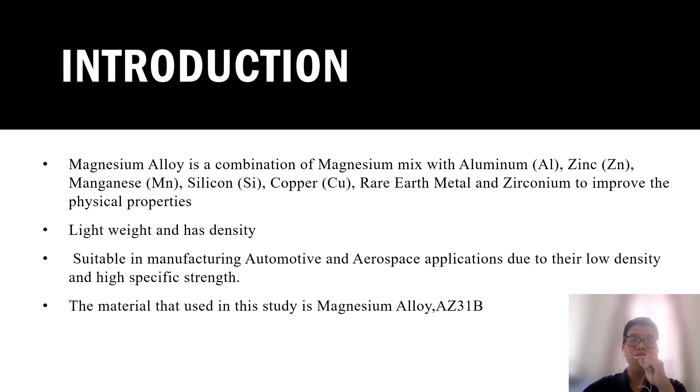The material used in this study is magnesium alloy AZ31B. Problem statement: Magnesium alloy AZ31B could replace rolled homogeneous armor RHA due to its impact behavior. However, the composition of AZ31B is insufficient to support energy absorption, which will cause this material to fracture. It also has low mechanical strength and poor ductility. Therefore, heat treatment and quenching process is needed.

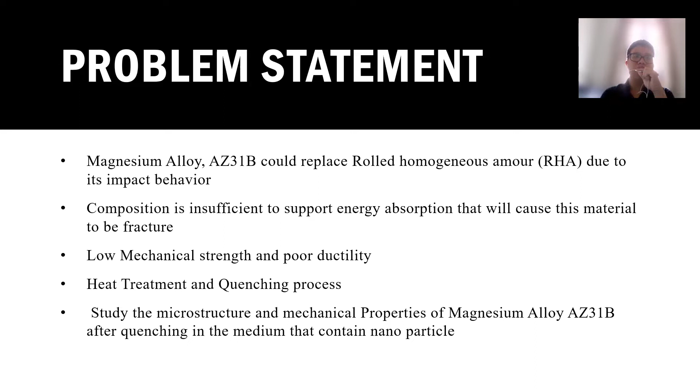The purpose of this project is to study the microstructure and mechanical properties of magnesium alloy AZ31B after quenching in a medium that contains nanoparticles, which is graphene oxide.

Objective: to evaluate the effect of various temperatures of heat treatment towards the microstructure and tensile properties of magnesium alloy AZ31B. Next is to evaluate the effect of various weight percentages of graphene oxide medium towards the microstructure and mechanical properties of magnesium alloy AZ31B.

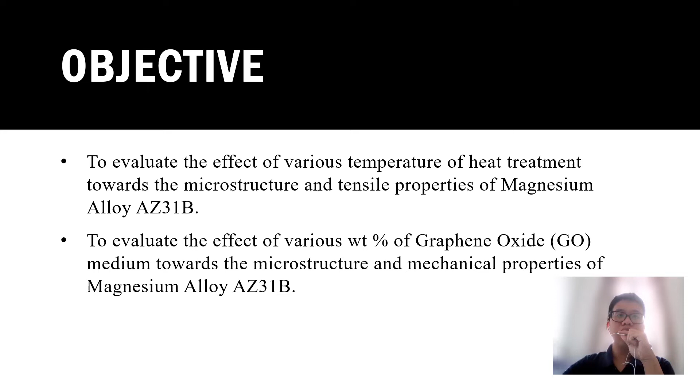Scope: the material used in this project is magnesium alloy AZ31B with heating temperatures of 250 degrees Celsius and 350 degrees Celsius. The quenching medium used is a combination of distilled water with graphene oxide at various weight percentages, and medium like air and distilled water as the control parameter.

Energy dispersive X-ray spectroscopy, or EDX analysis, will be conducted to see the microstructure of magnesium alloy AZ31B, to identify the presence of graphene oxide at the surface of the material and determine whether each specimen consists of graphene oxide or not. Tensile tests will be conducted to test the energy absorption of magnesium alloy AZ31B, to determine how much it can be deformed before it fractures.

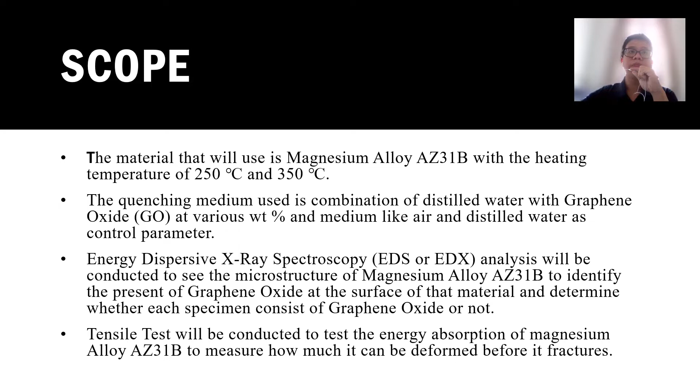Literature review. The material used is magnesium alloy AZ31B. The word AZ stands for aluminium, zinc, manganese, while 3 and 1 is the weight percentage of aluminium and zinc, and B is the second composition which has been registered at the American Society for Testing and Material, called ASTM.

Magnesium alloy AZ31B is a wrought alloy that belongs in the AZ series with high concentration of aluminium and zinc. It has 97% magnesium, 2.50 to 3.50% aluminium, 0.6 to 1.4% zinc, minimum 0.23% manganese, 0.10% silicon, 0.031% copper, maximum 0.005% iron, and maximum 0.005% nickel. The advantage of magnesium alloy AZ31B is it has high boiling point and good machinability.

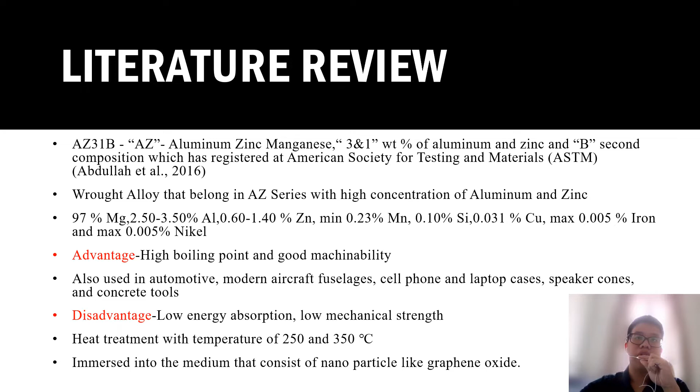It is also used in automotive, modern aircraft fuselage, cell phone and laptop cases, speaker cones, and concrete tools. However, it has disadvantages: low energy absorption and low mechanical strength. Therefore, heat treatment with temperatures of 250 and 350 will be used for this material. After the heat treatment process, it will be immersed in a medium that consists of nanoparticles like graphene oxide. These are the physical and chemical properties of magnesium alloy AZ31B.

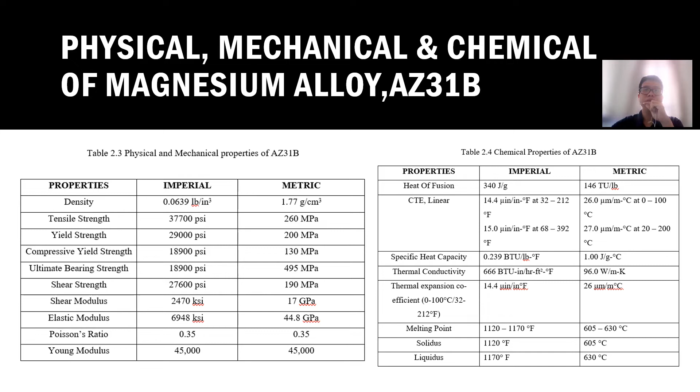Heat treatment is a process of heating the material in solid form and cooling it in a controlled way to obtain the desired mechanical properties without changing the composition of the metal.

It will modify the structure of the metal to become stronger, more malleable, resistant to abrasion, and increase ductility, making it more valuable in machining. There are three stages of heat treatment: heating stage, soaking also called holding stage, and finally cooling stage. There are five heat treatment techniques: annealing, normalizing, hardening, tempering, and nitriding.

When magnesium alloy AZ31B undergoes the heat treatment process, it will reduce brittleness and improve mechanical properties of the metal by changing the crystal structure and eliminating imperfections in the microstructure. It will also improve hardness value to prevent the metal from being fractured.

However, heat treatment is difficult to control when the material reaches high melting point, at 650 to 1050 Fahrenheit, or 340 to 565 degrees Celsius. This will make the material become soft, and finally it will cause defects.

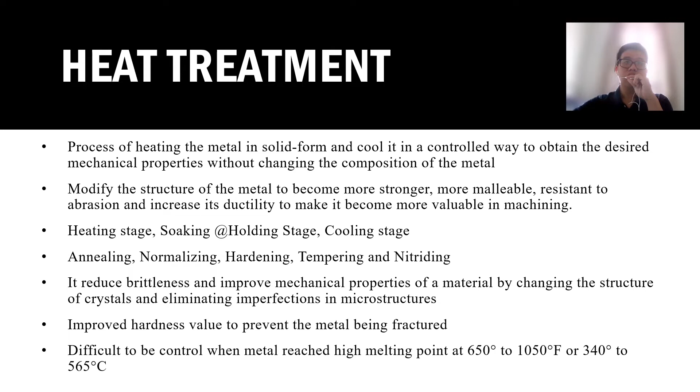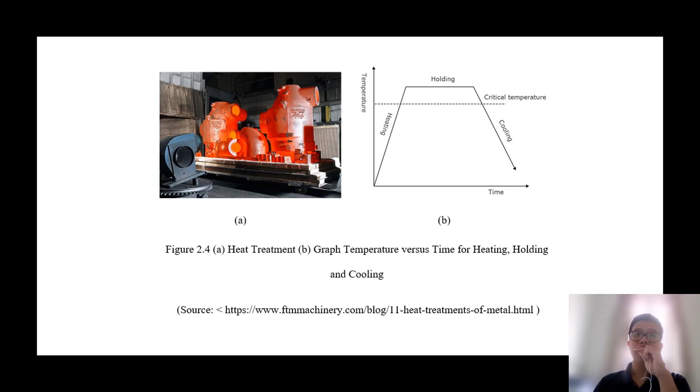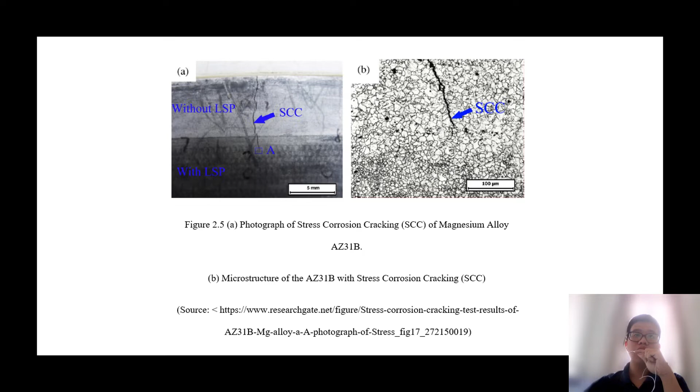Therefore, a quenching process is needed. Quenching process is the process of soaking the material at high temperature above the recrystallization phase, followed by a rapid cooling process to adjust the mechanical properties to its original state. Air, water, oil, and brine are examples of conventional quenching.

However, this medium does not have specific cooling characteristics. For example, water is the popular quenching medium because it is cheap and easily found. It has high cooling rate to be quenched for carbon steel. However, when facing the hot metal steel, bubbles will come up and this will cause cracking or warping. Therefore, quenching in a medium that consists of graphene oxide is a good way.

Graphene oxide is a structure that consists of a single atom layer with some functional groups such as carboxyl acid, hydroxyl, and epoxy. It has high tensile strength and is easily dissolved in water due to the plenty of oxygen contained in graphene oxide.

When magnesium alloy AZ31B is quenched in a medium that consists of nanoparticles, the graphene oxide will fill in the void between the atoms to produce van der Waals bonds. This will increase the mechanical properties.

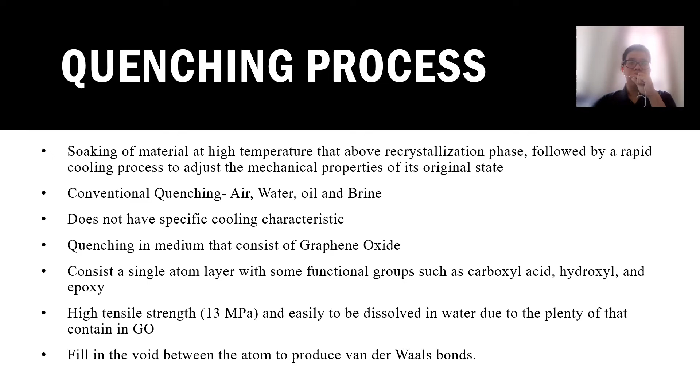Next is methodology. These are the flow of the experiment of magnesium alloy AZ31B. First, SolidWorks will draw the dumbbell shape. Then the laser cutting machine will cut the dumbbell shape on the raw material of AZ31B.

After that, the AZ31B will carry out the heat treatment process at 250 and 350 degrees Celsius for 3 hours. After the heat treatment process, it will carry out the quenching process for 30 minutes. The medium used in the quenching process: air; distilled water; distilled water plus 0.1 weight% graphene oxide; distilled water plus 0.3 weight% graphene oxide; and distilled water plus 0.5 weight% graphene oxide.

After the quenching process, microstructure analysis will be carried out. This consists of SEM analysis and EDS analysis. After that, it will carry out the tensile test analysis to test the ultimate tensile strength, yield strength, and young's modulus of magnesium alloy AZ31B after the quenching process.

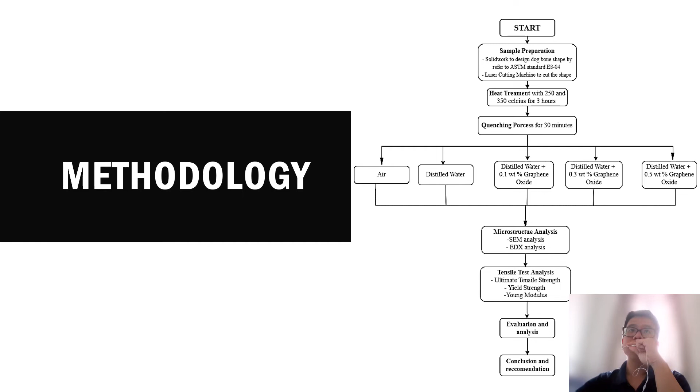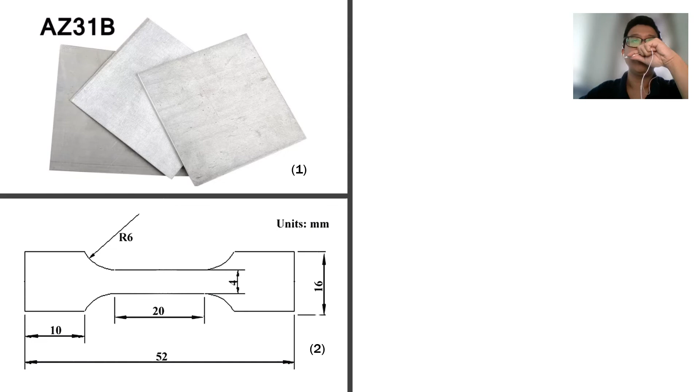Sample preparation. First, magnesium alloy with dimensions of 200 mm by 200 mm by 2 mm will be bought at Lazada. Then SolidWorks software is required to draw the dumbbell shape by referring to the ASTM standard E8-04. Then a laser cutting machine will be used to cut the dumbbell shape at the magnesium alloy plate.

After the dumbbell shape was created, it will carry out the heat treatment and quenching process. The machine used is the Nabertherm heat treatment furnace. This furnace will be preheated for 5 minutes. Then the sample will be placed on a brick to prevent damage to the furnace. After that, heat treatment will be carried out at 250 and 350 degrees Celsius for 3 hours. Then the quenching process is carried out by soaking the sample in 5 different mediums for 30 minutes.

To get the solution that consists of graphene oxide, use an ultrasonic probe to dissolve the graphene oxide powder in distilled water until the necessary amount is reached. Then, using a probe type ultrasonic processor, QSonica 700 sonicator, and an ice bath, do the sonication at 20 kHz for 15 minutes. To calculate the volume of solvent, you can use this equation.

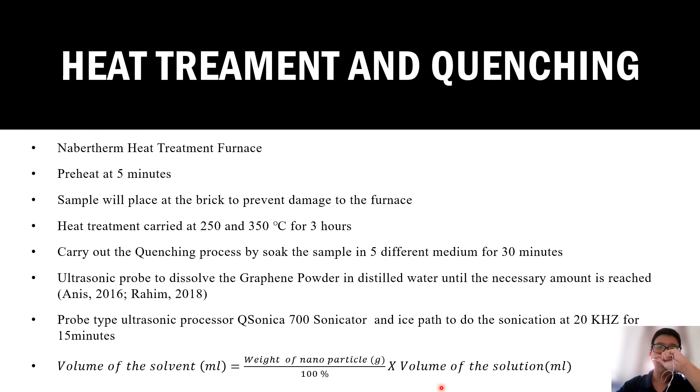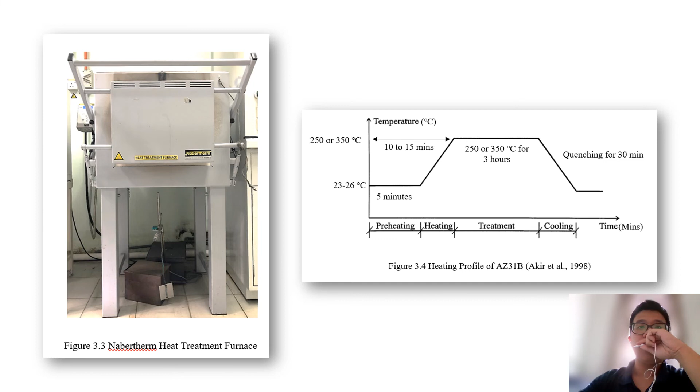After the quenching process, the microstructure analysis will be carried out. There are two types of microstructure analysis, which are SEM analysis and EDS analysis. SEM analysis is used to see the microstructure of magnesium alloy AZ31B. The machine that we use is the scanning electron microscope SEM Zeiss EVO 50.

To do this process, first we need to take a small piece of the sample and place it on the mount. Then place the mount under the vacuum chamber. The electron gun will create a high energy electron beam. The Everhart-Thornley detector will gather all the signal and the microstructure of AZ31B will be shown on the screen as a 2D intensity map.

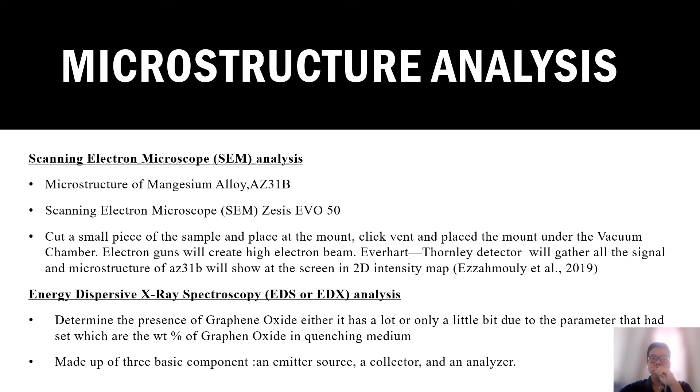Next is EDX analysis. It is used to determine the presence of graphene oxide, either a lot or only a little, depending on the parameter that has been set, which is the weight percentage of graphene oxide in the quenching medium. EDX is made up of 3 basic components: an emitter source, a collector, and an analyzer.

Finally is the tensile test analysis. It is used to investigate the ultimate tensile strength, yield strength, and young's modulus of AZ31B after heat treatment and the quenching process. The machine they will use is the Shimadzu Autograph AGX Plus.

To do this analysis, first we need to turn on the power supply and the PC. Then place the sample with the dumbbell shape at the tensile test jig. Then create a test method and put in all the parameters required, including the dimensions of the dumbbell shape and the force needed. After that, we'll start the testing. After finishing the testing, we'll save all the results, then turn off the power supply and PC.

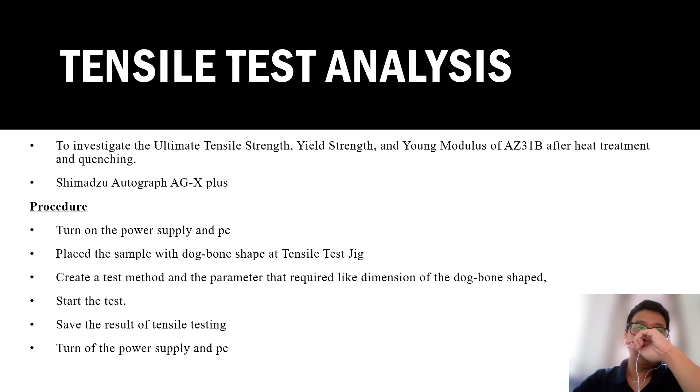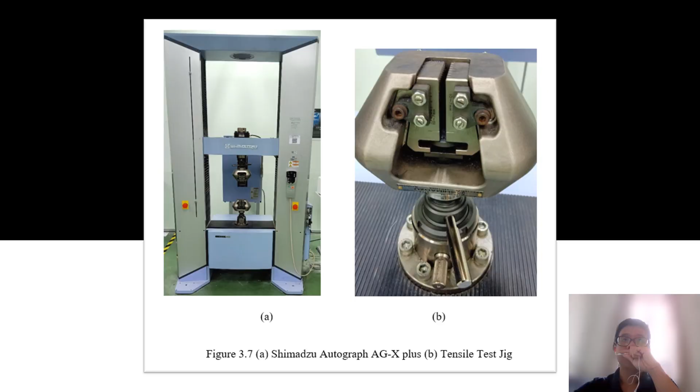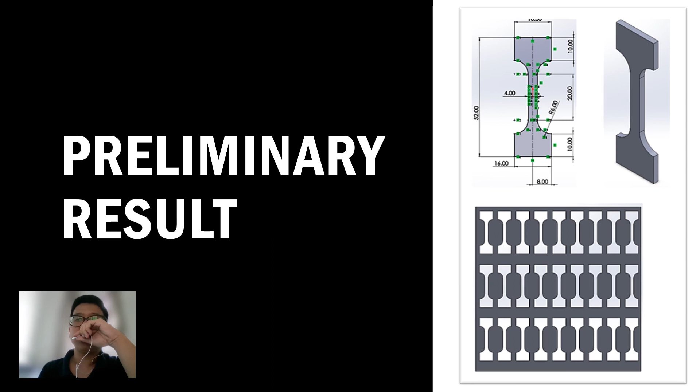These are the machines used in the tensile test, and these are the tensile test jigs. Preliminary results: these are the drawings that I had drawn in SolidWorks by referring to the ASTM standard E8-04. I also made some estimations to know how many pieces of dumbbell shapes will be created from the 200 by 200 by 2 mm magnesium alloy plate.